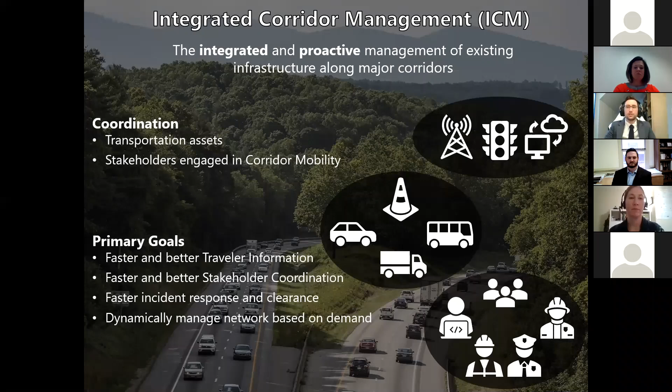I want to show you some of the tools that we use for ICM, and we scale these tools based on our traffic impacts. Whether it's a temporary single lane closure on a two-lane rural road, or a multi-year freeway widening project with narrowed lanes and barrier on both sides, we have a lot of different tools at our disposal to address those impacts.

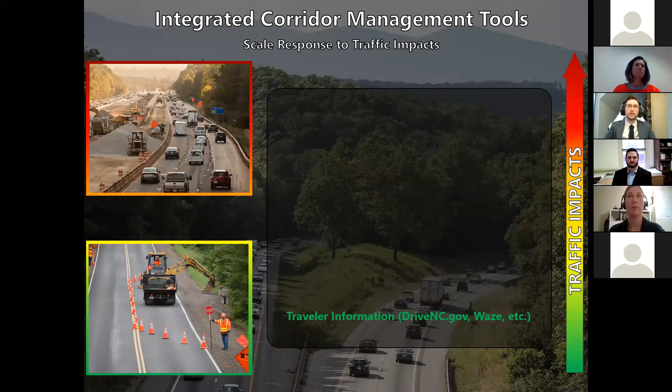At the lowest end, we have traveler information—putting messaging out on drivenc.gov and through Waze and some of our other partners. Coming up a step from there, we have pre-planned detour routes, as well as some pre-planned DMS and CMS messaging.

Coming up another step, we have pre-planned alternate routes and additional static trailblazers. Detour routes are used when we have essentially full closures and no alternative except to divert traffic, whereas alternate routes are used when we have something less than a full closure but think we might have available capacity on a parallel route.

Static trailblazers can be used on either type of route to help direct traffic along those alternate or detour routes. There's an example for our I-5111, I-40 widening project here in Wake and Johnston County, where we have these static trailblazers a lot further away than would be typical from the freeway to help guide traffic back to the freeway.

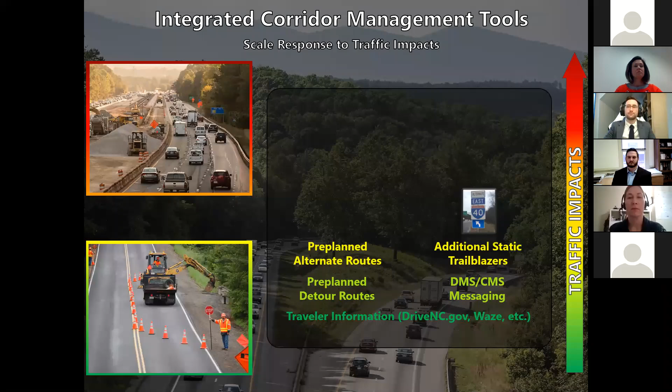New ITS devices—this can be cameras, DMS, CMS, or upgrading traffic signals, as well as expanding some IMAP routes. Additional IMAP resources could be additional drivers and additional trucks, and coordinated arterial signal timing is the development of dedicated signal timing plans to accommodate traffic that we divert off the freeway.

Contract tow programs in lieu of rotation tow programs, and changeable trailblazers. The changeable trailblazers serve the same purpose as the static trailblazers, but they're more dynamic because we can decide if and when we change the direction of that arrow.

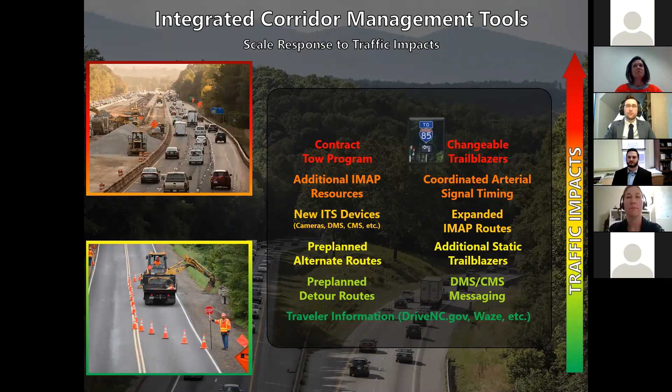99% of the time, the arrow on the LED panel points the same way its previously static sign would point. When we need to divert traffic, we can change the direction of that arrow, typically to guide traffic past an incident before they get onto the freeway.

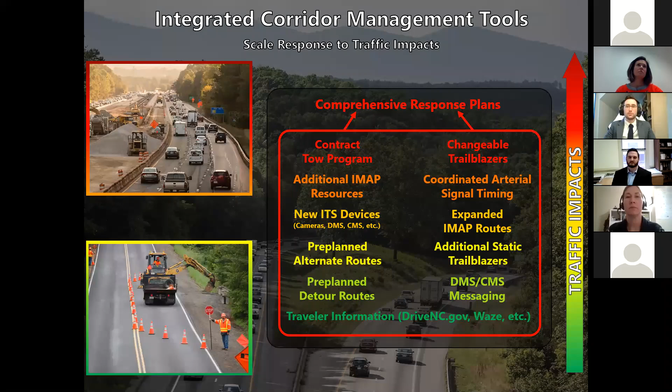And then the culmination of some or all of these tools come together to be our comprehensive response plans. And that's really at the core of what ICM is: our comprehensive response plans and deciding when to use them. So now that I've shown you some of the tools, I want to briefly show you what it actually looks like in practice with and without ICM.

So this would be like a typical incident response on a freeway without ICM. You see that we have a parallel arterial there with some traffic signals. First, the incident occurs and congestion builds.

That congestion grows and law enforcement arrives. Law enforcement will divert traffic. It may or may not be along a viable detour route, but it will provide some relief.

The TMC learns of the incident and deploys IMAP, traveler information, and DMS messaging, again providing some relief. The TMC, if necessary, can plan a viable detour route.

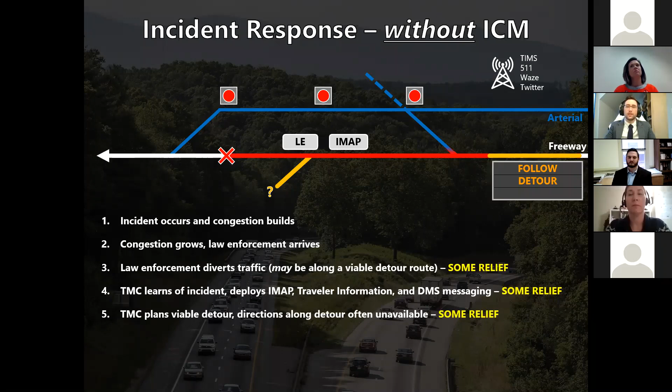However, directions along that route are typically difficult, if not impossible to give, because we're probably not going to have devices in all the right places that we might want.

A rotation wrecker arrives, and they are paid by the hour, so the removal time is typically kind of lengthy.

And then finally, where available, municipal staff can reactively adjust signal timing. So if we're lucky enough to have the route go through a municipality and some or all of those signals are on a centralized signal system, we can get in contact with them to have them make some changes to the signals reactively to try to accommodate that traffic.

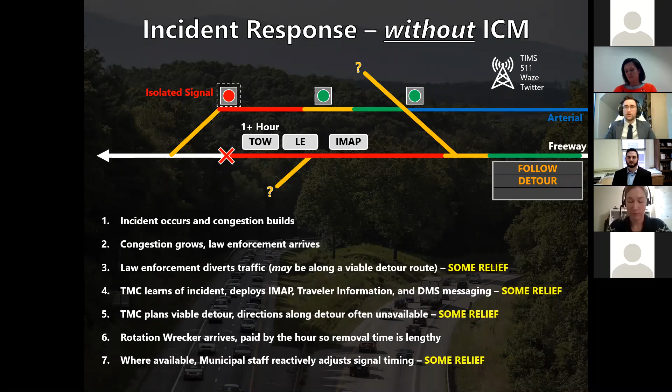So again, this is a lot better than if we did nothing at all, obviously, but it's not quite as robust as a full ICM response. Now let's look at what that would look like.

So an incident would start the same way. Incident occurs and the congestion builds. That congestion grows, law enforcement arrives and notifies the TMC. And this is one of the first diversions from the previous slide that you'll see.

We try to focus a lot on stakeholder coordination. So with law enforcement, we would have had a lot of previous conversations so that they would know that this is a particularly sensitive area and that we have a lot of additional tools in our tool belt. So they'll let us know as soon as they can so that we can get the wheels in motion. TMC deploys traveler information and IMAP, providing some relief.

Just like we will hopefully be more proactively notified, we will also proactively notify a contract wrecker and municipal staff. So again, that's that stakeholder coordination.

And step 5 here is a really big one. So the TMC would execute the planned detour, alternate routes, and signal timing. What you'll see here is that we have some additional either DMS or CMS signs that are in place. That's because we would have planned in advance where we would need all of our various devices.

We would also have planned exactly what the messaging will be on those signs so that the TMC operators can just click a few buttons rather than having to think about what the messages need to be and program them and push them. It can be done a lot quicker.

We also would already know exactly what route we're going to use based on the various parameters of the incident that has occurred, and we would have upgraded all of these signals along the route to be on a centralized signal system, probably our statewide centralized signal system, so that we have communications. And we would have already developed pre-planned coordination plans specifically targeted for these movements to carry that traffic.

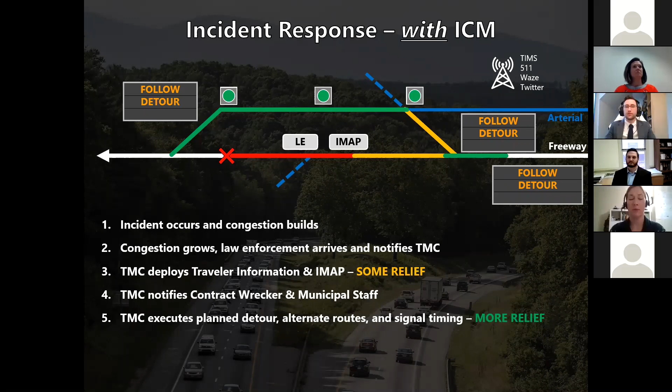And step 6 is very important as well. So a contract wrecker arrives, and versus a rotation wrecker, the contract wreckers have a financial incentive to get on scene quicker and to clear the incident quicker. So we've seen dramatically reduced clearance times so that we can better manage traffic while we have the incident still on the road, and we can also clear the incident quicker.

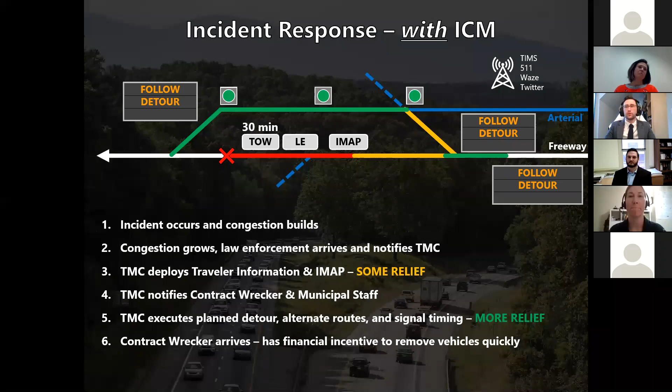So the primary improvements there over no ICM are the rapid stakeholder notification, a more coordinated and proactive response, better use of our network, and a focus on quick clearance.

The places where ICM makes sense: number one is locations with viable parallel routes. If we don't have viable parallel routes, we can still do a contract tow program, which helps quite a bit, and we can do some pre-planning of messaging and that sort of thing. But where we really reap the large benefits is where we have locations with viable parallel routes.

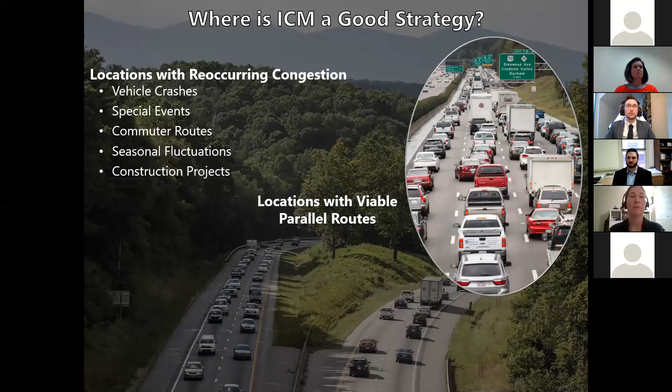We're also looking at areas especially sensitive to reduced capacity, locations that are already at or near capacity. We've been targeting largely TIP widening projects on the freeway, since typically the reason we're widening a freeway is because we're at or near capacity. We also target locations with recurring congestion and incidents occurring quite often.

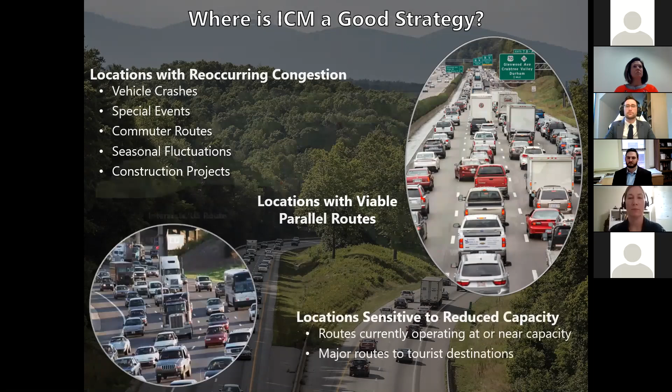So the projects we've done in North Carolina, we've done quite a few. The first one was Business 40 in Winston-Salem, which we kind of refer to as ICM Light because it was the first one we really did. We weren't quite dipping our toe in the water, but it was the first, so we've learned a lot of lessons since then.

We have some additional tools that we use now, and we've also gotten a lot more efficient at getting those things designed and put in the field. We also have I-26, which is currently under construction, and the ICM aspects of it are fully implemented just south of Asheville.

We also have I-40 south of Raleigh. Same thing, it's under construction, and all the aspects of the ICM have been implemented there for a year or so. We also have in design I-95 north of Fayetteville, as well as I-95 south of Fayetteville, so there are three different TIP projects in that area. We essentially have two different ICM projects covering those three TIPs.

And finally, we have I-85 west of Charlotte, which is the only standalone ICM project in the sense that it's not being done in conjunction with a freeway widening project. We actually got some CMAQ funding from Federal Highways specifically for ICM because it's a very busy section of I-85, and incidents occur quite often.

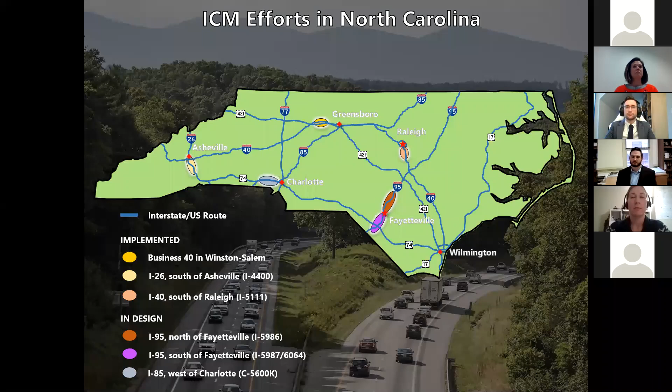And finally, I wanted to talk about our accomplishments. About three years ago, aside from having Business 40 getting ready to go in, and I believe some pretty early design work being done with the I-85 project, we hadn't done a tremendous amount with ICM. So we've come a long way in the last few years.

Since that time, we've gotten three projects actually implemented. We have over 130 miles of freeway covered by those projects. What that means is that anytime an incident occurs within those 130 miles, we know how to react and have a very robust reaction in just a matter of minutes.

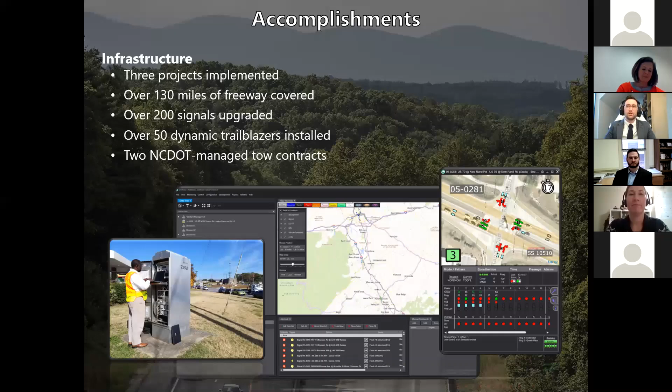We have over 200 signals that have been upgraded to be on our statewide Centracs signal system, and we've installed over 50 dynamic trailblazers, or they will be installed very, very soon. We also have two NCDOT-managed tow contracts in place, as well as some additional ones coming down the pipeline.

But perhaps even more important than the hardware we've gotten out on the ground and the decisions that have been made are the improvements and documentation we've made to the actual process of developing and implementing an ICM.

Three years ago we had done some work, but very little in the way of actually documenting how to do it. I think if the right set of maybe six people just disappeared, we would have had to start from scratch. So luckily we've now documented a tremendous amount of the process so it's not relying on just a handful of people who have the knowledge in their heads.

The first thing here is the project process outline. This is, I think, a 20 or 30 page document that's still in draft form, but getting very close to being finalized. It documents from A to Z everything that needs to be done, to the best of our current ability, for an ICM project, from as early as planning, when you're looking three or four years out before letting a freeway widening project, all the way up to actual implementation, testing, after-action reviews, fine tuning, and long-term maintenance of the system.

We also have our decision matrix tables, the two spreadsheets you see on the left side, which aid us in deciding what to do based on the various parameters of an incident.

Well, I'll come back to that.

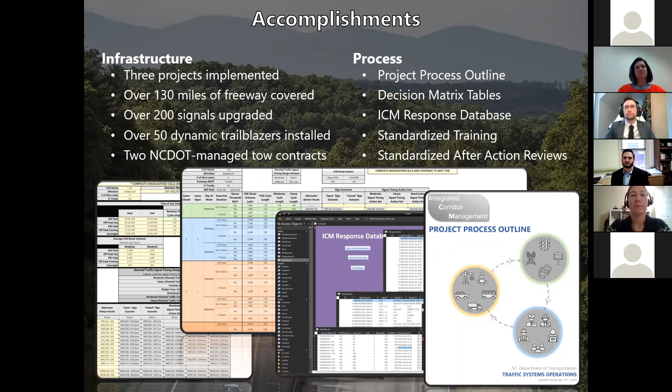Sorry for the dramatic long pauses. I'm waiting for my presentation.

So coming soon, we have 3 additional projects being implemented this year. So that'll take us from 3 to 6. We also have 3 Centracs server to server connections that will be made. So again, I talked about our signals being upgraded so that we have remote communications with them. We are also connecting the NCDOT statewide Centracs server to Gastonia, Charlotte, and Fayetteville for various ICM projects, so that for all intents and purposes, they will act as one large

system, so that we don't have to call Gastonia or Charlotte and say, hey, turn on this signal timing on these 3 different signals. The TMC operators can just click a button and it sends all of the right messages to all of the correct signals, regardless of whether they're a Charlotte signal or a DOT signal or a Gastonia signal.

And finally, things that we're still working on are continuous improvements. A really big one is reducing our overall timeline. And we've already done this a lot. I think that 2 or 3 years ago, it was probably taking 2 or 3 years from initial conception to actually getting something implemented. I would say we've gotten that down to as short as maybe a year or less at this point, and I think there's still some room for improvement. And again, a lot of that has to do with documenting the process and how to do it.

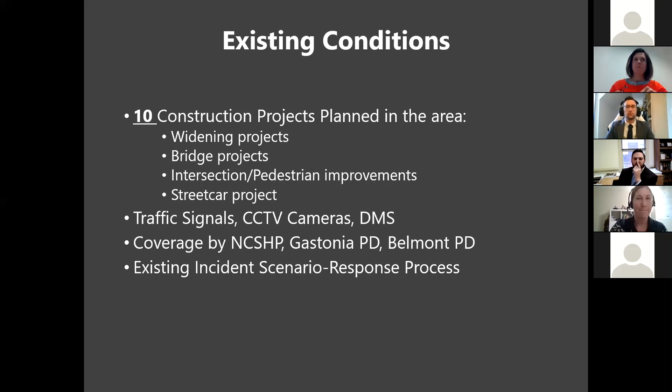And then of course there were already existing detour routes. So not only are we looking at alternate routes, but do we need to incorporate the detour route? That was a question that we had asked, and it was a very fluid decision because we went back and forth with that. Ultimately we did include the detour routes, but that was something that we had to also coordinate with. So after we have the existing condition, one of the other things that we have to look at is the actual ICM system. So what is it that we need to implement? So again, we're working with the stakeholders.

We're looking at what is actually existing in the area. And then we wanted to consider, well, what do we want to install? What do we want to implement? So we decided that we would go ahead and implement some cameras because we were talking to operations, and operations said, we have some blind spots. We need to be able to see what's happening.

Then we wanted to incorporate or install some DMS. We needed to be able to coordinate with providing traveler information to the motorists so we could give them the decision points. They needed to be able to make a decision before it was too late. And then, of course, as I mentioned, there's 3 different signal systems. And so we needed to coordinate with each of the municipalities to figure out how we are going to coordinate all of that together.

We'll go back. And how does all that work? We initially had one idea, and of course, through coordination with all the stakeholders, we came up with a different plan at the very end. And then, of course, once you're on 74, how do you keep the stakeholders moving? So again, this was more of a conversation, a discussion, and that's where we decided on the changeable trailblazers, and I think Cole is going to go into a little bit more about the design of those and how they actually work.

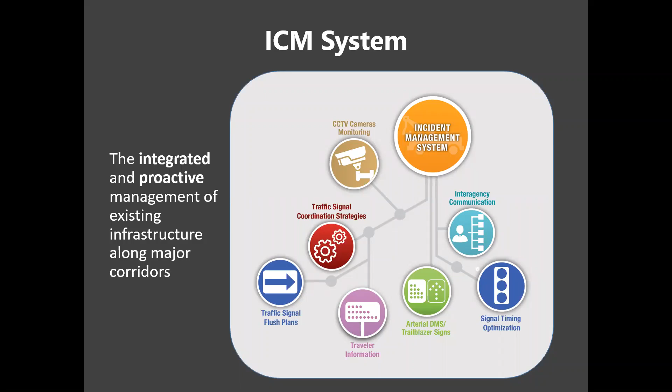So who are we coordinating with? Well, we're coordinating with some stakeholders. Who are those stakeholders? The stakeholders are essentially DOT, Gastonia, and Charlotte. It's that easy, right? Well, not exactly as easy as you think. So first, we have invested partners. In this area, we had some folks who had a very invested interest in what was happening in the area, both from Belmont and Gastonia. And so we needed to hear what their opinions were and what they would like, and we had to incorporate or think about what that was.

We also have 2 consultants. Contractually, we're not partners, but as a whole project, we needed to work together. There was a lot of coordination between the signal timing, which AECOM did, and then the design and operations that Kimley-Horn did, and one impacted the other. Then, of course, you have the statewide operations looking at how does this operate, what are some of the things that we need to consider. But then you have your statewide signals, the signal timing, so you can't leave out Matt and his group.

And then you have the different municipalities. You have Gastonia, you have Charlotte, and then you also have Belmont. Even though Belmont has DOT signals, they still had a vested interest. We are putting traffic on US 74 through Belmont, so there is a vested interest for them to understand what ICM was, how it was going to work, and how this hopefully was going to help alleviate some of that congestion during the incidents. You also have the ITS design group. We had to design some infrastructure that had to be put onto the roadway, so they were the ones reviewing what we were doing and approving.

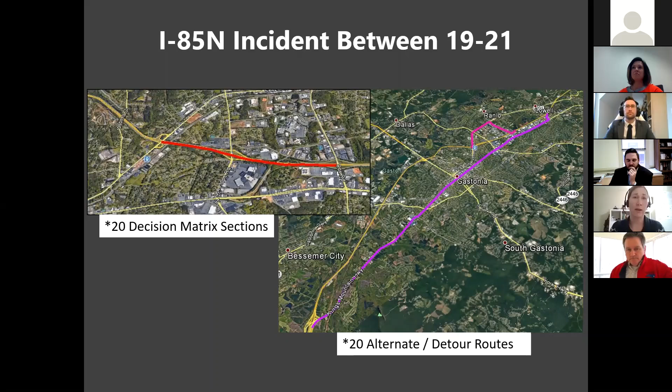All those outputs had to have specific coordination with specific people, and some of them spanned multiple people. Some were just like, hey STOC, how do you do this overnight? Or hey Metrolina, what do you guys do when this happens? And there's a lot of coordination with Division 10 and 12.

All of these spreadsheets were put together and provided to all the stakeholders. We wanted them to review and make sure everybody was good with what we were developing, and through some verification process, we hope that everything will still be good.

Once we get the go-ahead from Matt, we'll schedule the verification process testing. We'll identify some incidents, take all of the primary stakeholders together, and go through those incidents. We'll see what is inputted into the database and what outputs result, making sure that's actually the response we want.

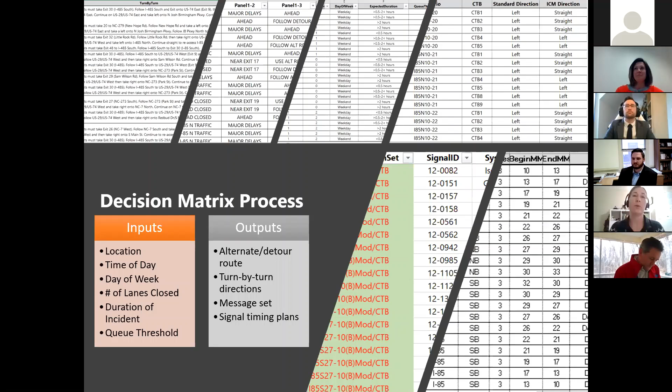We'll go through and ensure that the messages are correct, that the signals involved in that response are correct - another coordination piece involving a lot of different people. Ultimately, we have lots of different stakeholders we had to coordinate with. It was a very fluid process that changed, not dramatically, but a lot from the beginning to the middle to the end.

And then, of course, we have our final ICM decisions that we hope are the most appropriate and most efficient for responding to an incident on I-85. And I'll turn it back to you, Carrie.

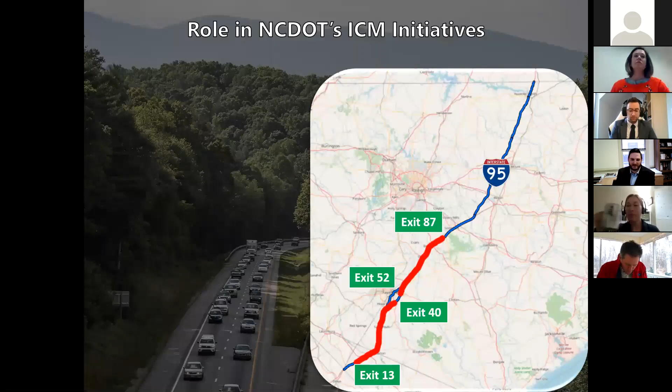My role with NCDOT's ICM initiatives is being the project manager for I-95 ICMs, and there have been two projects. The first is between exit 52 and 87, tying closely with I-5986A and I-5986B TIP projects, widening I-95 from a 4-lane to a 6-lane section. The second project, between exit 13 and 40, is just getting started, related to the I-6064 and I-5987 TIP projects, also widening I-95 from 4 to 6 lanes.

I-95 is mostly in a rural area. It does go through Fayetteville, with some close-by towns such as Benson, Dunn, and Lumberton. So there are some smaller cities and towns, but primarily the routes used on these sections are rural 2-lane roads. It's a little different than some of the other ICM projects, so we had to mold our approach for response plans and route development for this project.

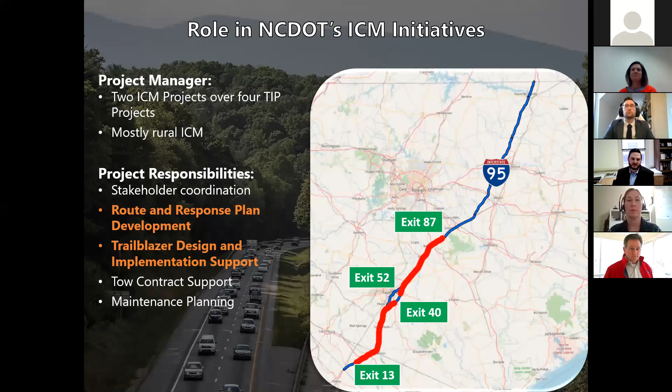For route and response plan development, it started with a really simple Google Maps layout of potential parallel routes for the corridor. For the section from exit 52 to 87, you can see there's a great parallel route in US 301 because it's so close to I-95 all along the corridor. The only downside is that US 301 is a rural 2-lane road, so that was something to overcome with the project.

We also have US 13, which intersects with US 421 and Interstate 40, as a kind of longer alternate route option.

Route development really is a coordination effort between STOC staff and division staff—in this case divisions 4 and 6. We went through a process of discussing what routes they normally use for incidents in the area, how those have worked, whether there are trouble spots with geometry, signals, or 4-way stops, whether schools along some routes may impact alternate route traffic in the AM peak hour, and whether there are any points of confusion along the route. We got together and talked through this with folks experienced in managing these corridors day-to-day.

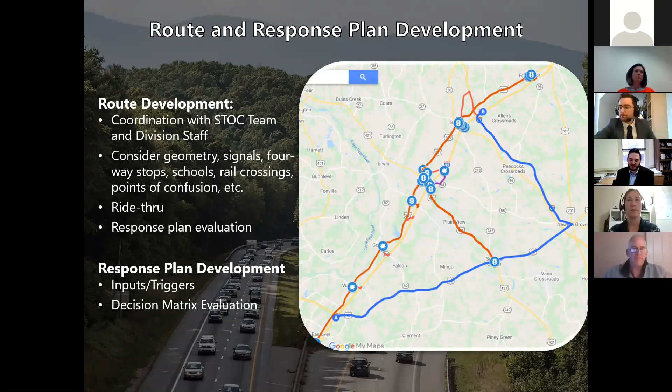The route development then transitioned into response plan development. Amanda's already talked about this a little bit, as well as Matt—you saw a picture of one of these decision matrices earlier on a slide that Matt had.

We looked at a lot of different factors for each section of road that may be closed: is one lane closed and one open, or are both lanes closed; is it a weekday or weekend; do we expect the incident duration to be less than a half hour, between a half hour and 2 hours, or more than 2 hours; and does it meet a queue threshold? That threshold can be defined depending on the area of the road, but in general our rule of thumb was 5 miles.

If the queue has backed up 5 miles from the incident, we may need to go to a more intensive response plan than if it's a shorter queue. So we looked at these things and developed, we assigned a route to any specific scenario or set of conditions. We developed message sets for DMS and CMS sign scenarios, as well as trailblazer scenarios, which are associated with these, to assign to the routes. And then again, signal timing action sets, which Steve's going to talk a little bit about later, so which signal timing plan should we use depending on the route that's been developed.

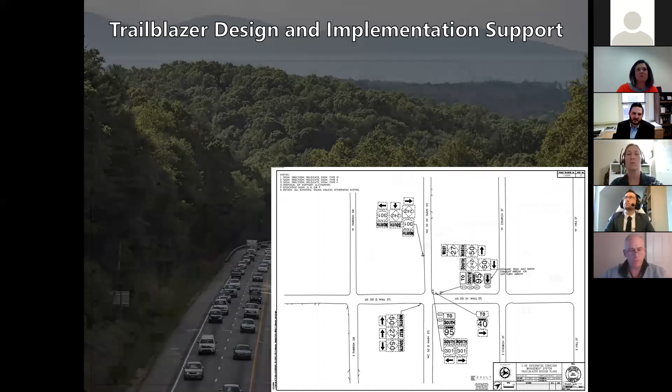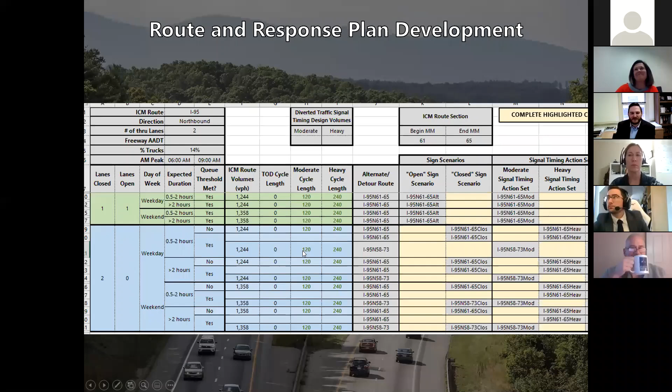But we also use dynamic trailblazers at locations where, for example, on 301 - 301 is used as an alternate route all along this corridor. You can see here that these dynamic trailblazers are being changed because normally they would tell you to turn right to go get on I-95 North. But here we're changing them to tell you to continue going straight through because there's an incident, and we don't want to direct traffic to make a right here to get back on I-95.

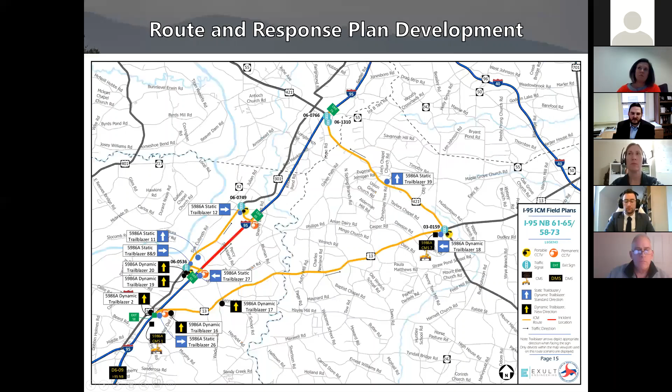So those dynamic trailblazers can be controlled in one of two ways. The primary way that they're controlled is through integration with the traffic signal at the intersection. So if there's a traffic signal at the intersection, the trailblazer can be wired into the intersection and be a phase associated with the signal timing plan.

For locations that are in the middle of nowhere along rural routes where there's no signal, we had to develop a new design for that, and our idea around this design is treating a changeable trailblazer like a small dynamic message sign, where it has a controller built in, it has a modem that connects it to say a DMS messaging software, and so we're able to push a message set, push an arrow to the sign, almost like a message to a DMS to display the arrows.

And so another aspect of the project is implementation support, so developing procurement and supporting Division 6 and Division 4 with procurement of the trailblazers.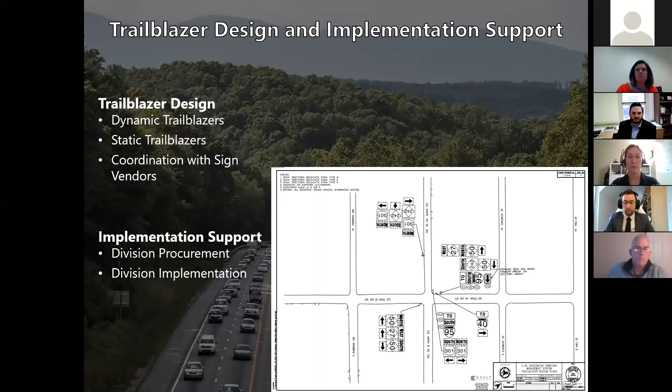So I wanted to give you some examples of challenges and lessons learned. This is an example in Benson. You see I-95 on this side, and on the left side is US 301 going through Benson, and Main Street connects I-95 and US 301.

What we realized is that trucks can't make that right turn from NC 50 to US 301 North without law enforcement backing up the traffic on the southbound side. It would cause so much delay that we decided this wouldn't be an alternate route.

One of the things we did take into consideration is that NC 50 would still be used by motorists using Google Maps or Waze for guidance. They may still take this exit and use 301 as an alternate route. So we took that into consideration and developed an unadvertised route signal timing plan for vehicles that may use this route, but we didn't direct motorists to use this alternate route.

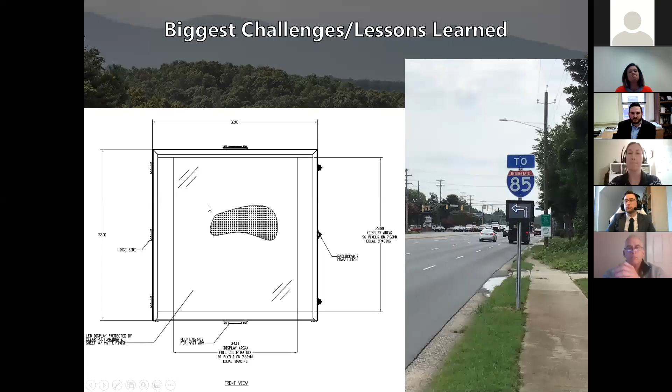This is an example of another thing you see in the field, really using a map while evaluating the routes. US 13 comes up through Newton Grove to get back on I-40 when we're using this long route, and it goes through this roundabout. We were out here looking at this in the field and said, we've got to get I-95 traffic to take not the first, not the second, not the third or fourth, but the fifth right turn in this roundabout. How do we keep folks on track through this roundabout?

What we came up with in the end was, for folks going northbound on this northbound alternate route—and both of these routes aren't implemented at the same time—we would have folks take this side street, a left early on, and then another left, rather than trying to get them to traverse the roundabout. On the southbound side, it was pretty easy to sign, taking the first right out of the roundabout on the US 13 alternate route. So that's an example of a routing challenge and how we solved it.

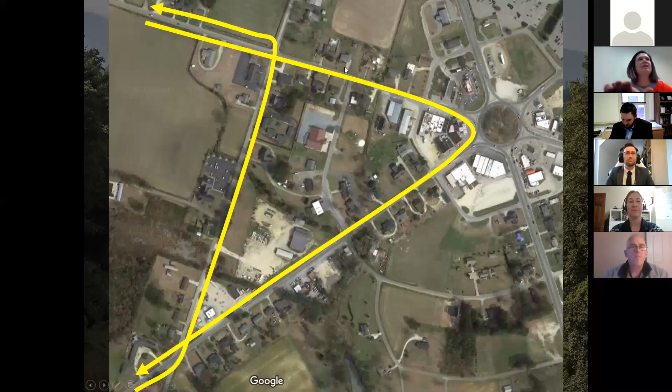Steve serves as the traffic engineer for RS&H's North Carolina Transportation Infrastructure practice. He has experience in traffic engineering, ITS, and traffic signal systems throughout the Southeast. Steve's broad range of project experience has included traffic signal design, communication cable routing plans, CCTV monitoring systems, and weigh station feasibility studies. But his first engineering love is traffic signal timing optimization, so he is going to talk to us about the traffic signals as part of this.

Steve, do you want control or you want me to flip through for you? I'll take control. There we go, requesting.

Is it going to come up here? There we go. Oh, you did. Oh, okay, you did something fancy with it here.

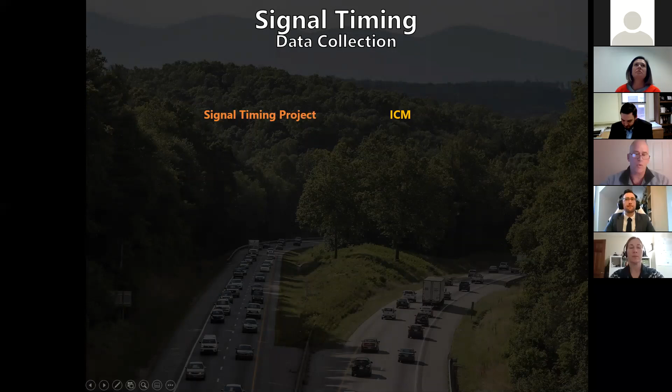All right, so I thought the best way to go through signal timing is just to compare and contrast the regular signal timing project with an ICM project. But first, some overall thoughts. The big difference, the obvious difference, is just the sheer size and scope of the networks. With a signal timing project, it's a very defined box that we work within. Let's say you've got 5 signals, you've got 4 timing plans, and you're going to get 2 new TMCs, turning movement counts, for this project, and you work from that.

With the ICM project, it kind of took on the feel of a congestion management project. We had to do some traffic volume synthesis. We analyzed multiple detour routes, multiple networks, and individual signals. We had multiple priority movements at each signal. For the I-95 ICM project, we had 31 signals, 50 detour routes, 93 priority movements, all spreading over 3 divisions.

A note about the priority movements: in ICM lingo, we're calling it local level priority movement designs, or LLPMDs. Not the easiest to say. So for, let's say, an isolated signal, you may have a northbound through and a northbound right LLPMD. And each LLPMD would have 2 levels of traffic associated with it, a high traffic and a medium traffic. So basically, with the size of the project, it was just hard to keep things straight in your head.

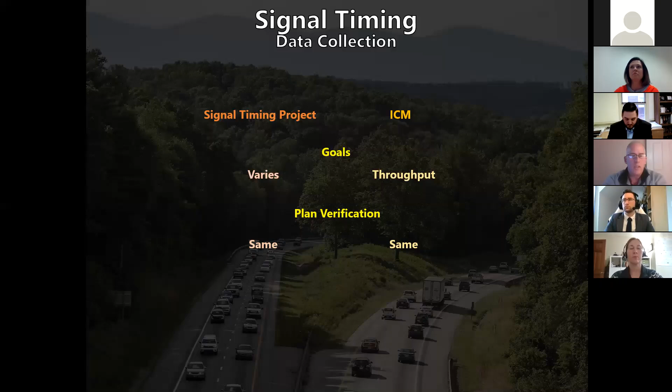Okay, so for the signal plan verification, there's not really any real difference. You go out and visit the site, you redline the signal plans, and you ensure that all the equipment's working. Next. With volumes, it's a big difference, and that's what I'm mainly going to be focusing my time on.

You may, yeah. Okay.

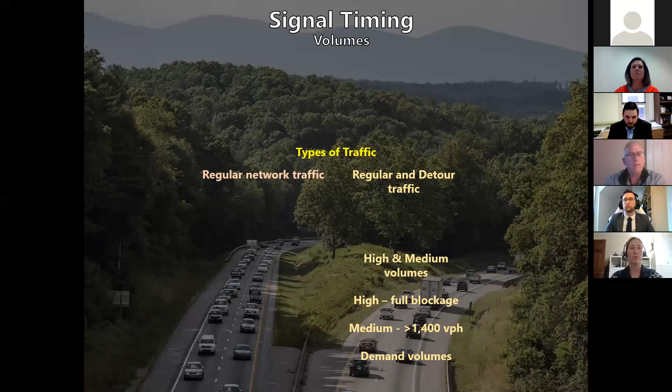So with a regular signal timing project, you get new turning movement counts for your critical intersections, then you use historical TMCs for the other intersections, and then you apply a growth factor. At least before COVID, you did that. With the ICM projects, you have to deal with 2 types of traffic: the regular network traffic that's on your networks every day, and the detour traffic that's coming through. You're dumping an interstate's worth of traffic through a network.

With the network traffic, in the ICM project, we're using a lot more historical TMC volume information off of the NCDOT website, just because of the cost of collecting the TMCs. We did get new TMCs at a variety of important intersections where we didn't have recent TMCs. So with the detour traffic, like I said earlier, we need to determine a high detour volume and a medium detour volume.

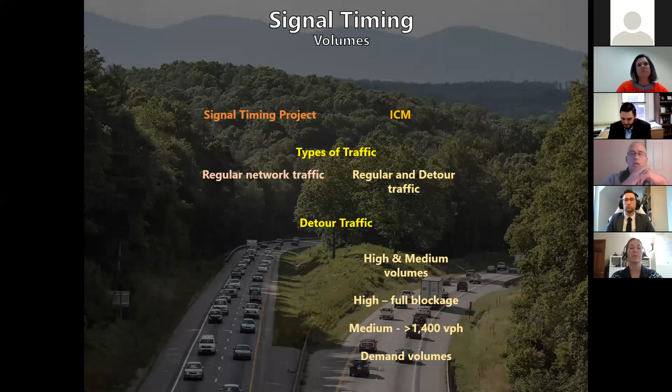But first, what we needed to do is determine the volumes on the interstate. And we did that through a variety of methods. Sometimes we had actual 15-minute counts on the interstate close to an exit where we had to fit the detour. Other times, all we had was AADT, and what we did is just apply a D and a K factor to get an hourly directional volume.

Like I said earlier, we needed to determine high and medium detour traffic levels. With the high volume, we decided that was going to be a full interstate blockage, and whatever volume is on the interstate, that is the number that wants to divert onto the detour. With the medium traffic, it was a little bit more involved. We assumed that one interstate lane would remain open, so we had to determine what's going to dump off. And we found a Maryland DOT study that said the capacity of the remaining lane of an interstate highway was 1,300 vehicles per hour.

But the Highway Capacity Manual said that the capacity is 1,500. So we split the baby and used 1,400 vehicles per hour. And so the medium traffic that, again, wants to divert off the interstate is the interstate volume minus 1,400. And that's for the medium traffic.

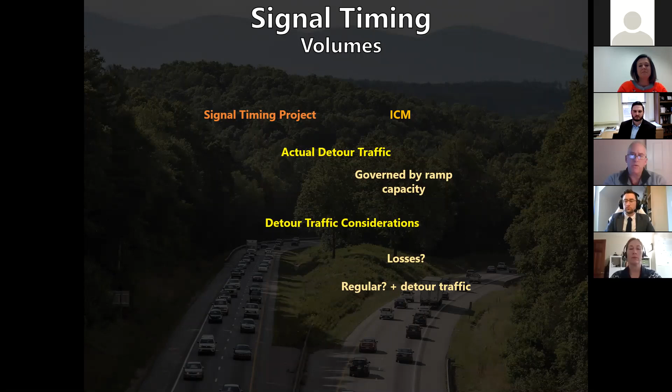So the ramp capacity, I'm gonna clear my throat here for a second, for an unsignalized intersection is determined by the traffic that's on the main line or the road that's at the end of the ramp. So to get the detour volume, what we did was divide the movement volume by the volume to capacity ratio and then subtract out the regular volume.

For the signalized intersections, a little bit more iterative. We just made an assumption that the ICM action plan would be implemented, and the cycle length would be jacked up a lot. So we did just a rough high cycle length and modified the split to maximize the flow off of the ramp.

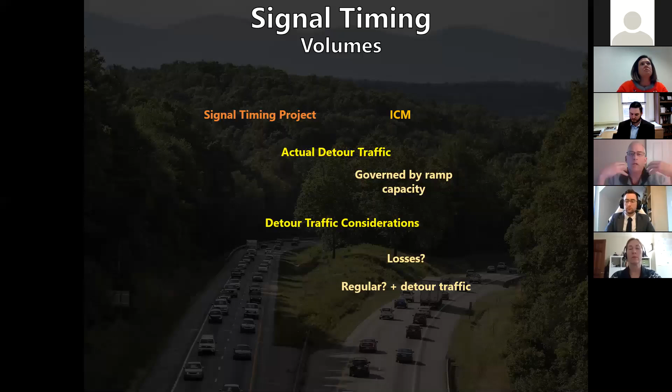And then what we did was divide the volume for that movement by the volume to capacity ratio to get the detour volume. So now we've determined a detour volume. We know that there's going to be losses over the course of the detour route, but you can't really predict that too well. So for the worst case, we just stuck with the volume that we determined, and we said it's going to go through the entire detour.

There were some exceptions to this, especially going through Benson and Dunn, where you have a grid network to some extent, and people will filter through that network. Okay, so getting back to the detour volume.

I apologize for having to clear my throat.

Here's a curveball for you. What time period do you use for the TMCs? You don't know when the accident's going to happen. So what do you use? Do you go with a worst case scenario, say PM peak? Or do you use, say, a midday volume that is probably more representative of the day as a whole?

We decided to go with a midday traffic level, just because it does cover more of the day, or is more representative of the day. And then also we figured that the detour traffic is going to overwhelm any local traffic that you have. Moving on to timings, I don't have a little entry for that, I don't believe.

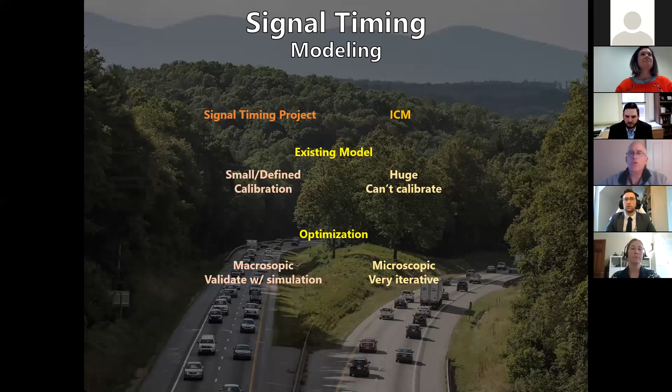Moving on to timing parameter preparation. So another big difference here: with a signal timing project, you generally have 4 to 6 plans that fit nicely in plan 1 to 10 on Centracs or OASIS. But with ICM, we had to provide a system of plan numeration that was with the end user in mind, the STOC and the TMC operators.

And this is just us. I don't know what the other firms have done with the other ICM projects, but you've got 64 available coordination plans, and a great majority of those coord plans are never used.

And so what we did, we consistently assigned coordination plans 20 through 29 to all the LLPMDs that were geographically northbound, 30 to 39 for eastbound, 40 to 49 for southbound, and 50 to 59 for westbound. In other words, 2 was always the first integer for north, 3 for east, 4 for south, and 5 for west. And then there are 6 possible LLPMD cardinal directions that are associated with each direction.

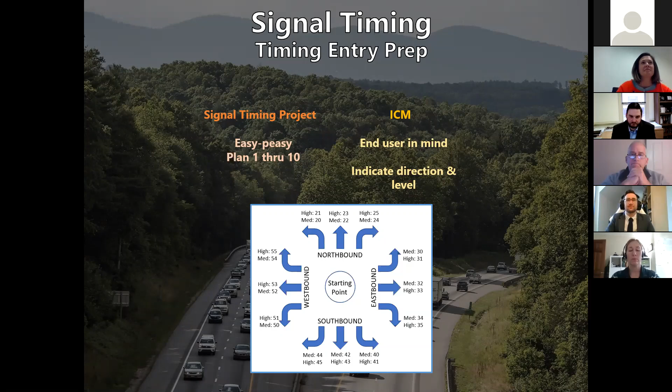Moving on to implementation and fine tuning. The difference here is with a signal timing project, you implement on site. And then with ICM, what we're going to do is, with the wonders of Centracs, we're going to implement from the comfort of our office and make sure that the signal timing plans kick in and nothing blows up. And we're going to do that late at night.

And then with fine tuning, again, you're out on the street corner, you're observing, and you're making adjustments to the splits and the offsets and stuff like that. Whereas with the ICM project, we're going to have after action reviews and get an earful maybe whether things work or not.

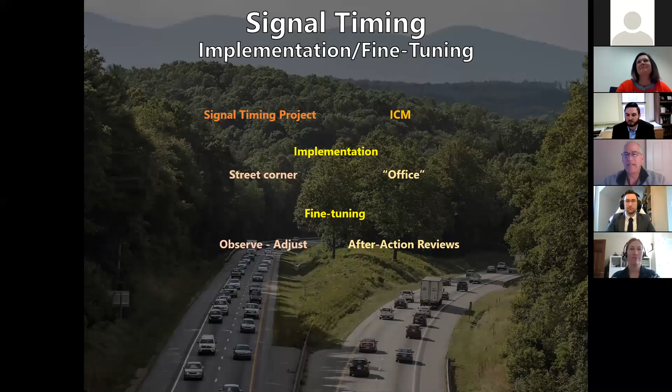So with that ends my presentation. I am curious as to how the public's use of navigation apps is going to affect these ICM projects. We've seen in some signal timing projects that we implement signal timing, we've improved things, and then we come back a day or a few weeks later, and it seems like the navigation apps have directed more people onto our route, and thus made things a little bit not so great. So with that, questions or crickets?

We had one quick question, and we need to speed up a little bit. Sorry, just because we still have 2 more presenters. We only have 20 minutes.

Was dynamic max for priority movements considered or implemented at isolated intersections? I know, well, Matt says no. He's shaking his head. We did some of the signal timing as well. We did put some of the coordinated movements on max recall to make sure that they did not gap out or have any other issues, like say if it was a left turn, but not a dynamic max.

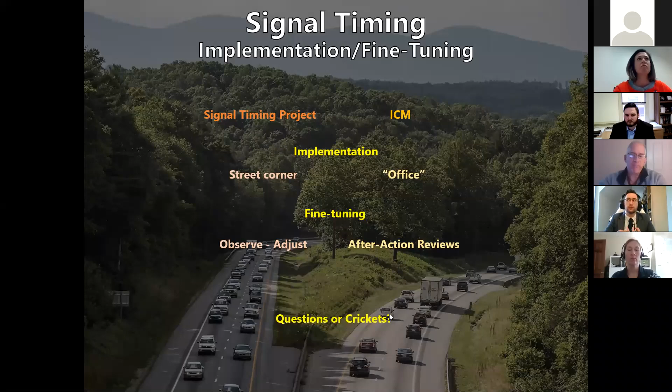We have Doug Hayes, the Regional Traffic Incident Management Coordinator. He's been heavily focused on the tow contract program for the last 4 years. Doug is a retired captain with the North Carolina Highway Patrol, and he often misspells Brian's name on email correspondence. So we're going to throw him under the bus. At least he doesn't type 'brain' - it could be worse. Well, no, I do that too, Doug, sometimes. So, Brian, are you still on here? Oh yeah, I'm here. Hey man, let's you and me liven this thing up a little bit.

Alright, so I've got good news for anyone traveling along I-95: instead of putting us last, we're actually at the very beginning of these ICMs. So we have a tow contract in place, and of course we have ICMs that you guys have got a thorough understanding of now. The vast, vast majority, over 90% or more of these incidents get cleared up prior to an ICM going into place. So planning for this and explaining how the ICM and tow contract work together is sort of tough - it's not a round peg into a round hole. That's where Brian comes into play on a lot of these things that are predetermined. Sometimes Brian is able to utilize the towers to decide whether an ICM goes into place or not.

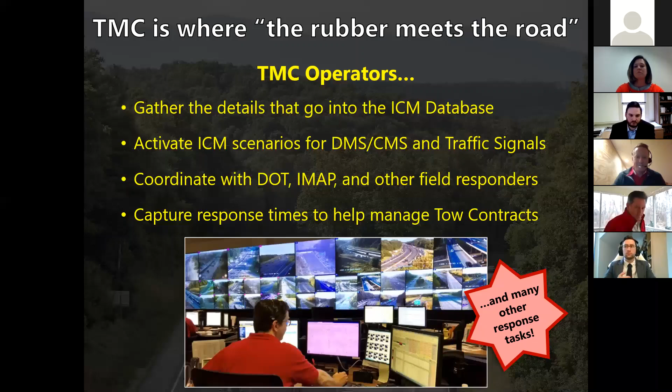There are so many benefits that ICM brings—it's such a great strategy, and I'm so happy to see us implementing it more and more statewide.

There are a lot of benefits it brings, but from the TMC perspective, one thing that's just inescapable to us is how much faster we can execute really robust and complex response measures. A big example is activating multiple signs with very specific detour information.

Usually for a major incident like this, we're going to be using anywhere between 6 and 10, maybe a little bit more, different changeable message signs or dynamic message signs. And we're not just putting up there that says road closed ahead, use detour. We're telling people exactly where the road is closed and exactly what detour to take.

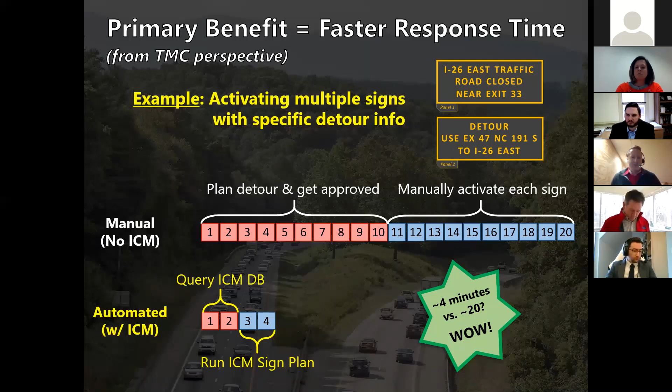Now there are some challenges, of course, with ICM. A lot of people have talked about different challenges on the design side of things. For us, one of the big challenges that we have is training. There's simply a lot of people to train to execute ICM. A lot of good work has been done on the design side to standardize what ICM is, to build the same sort of tools into the process. So we're using Synchro, for example, for all of our signal timing. That's excellent. That means that I don't have to teach Synchro plus Acme product X plus whatever the other thing is, just to do the same job.

But one of the other things, especially now that we have a few ICM projects rolling, is we'll have a crash, we'll do an AAR about it, and we'll discover some gap or some improvement. Every time I walk out of one of these AARs, I come away with at least 2 to 3 new things that I have to get into the heads of all of these different people. It takes some time to do that, but ICM is still evolving, so there's this ongoing conversation between me and my staff about what's the new thing with ICM that we're doing now.

Just briefly, another challenge from the TMC's perspective, and I think this is actually fairly common: we're always sitting in the control room looking through these cameras at people clearing incidents, and we're like, what are they doing? Why are they parking there? Why are there so many people on scene? Obviously the different responders have their own priorities and things that they need to do.

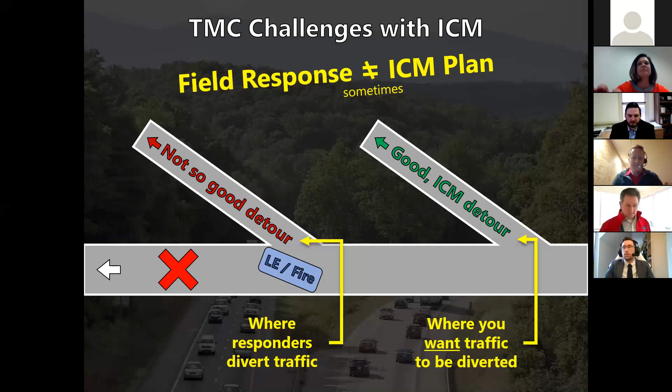So just in summary, TMCs are the ones that actually take ICM out of the thought realm, out of the realm of concept and spreadsheets, and put them into the real world. We're really much a handshake on the design and execution side of things. From our perspective, it's only been going on for a little bit, but everywhere we see ICM in place, we think it's working.

I'd be really excited to see a lot more academic research done on that, because I'm sure the news will be good. The other thing is that ICM is still evolving and still getting better, and the more we learn about it, the better we are at designing it and executing it. So thanks, everyone.